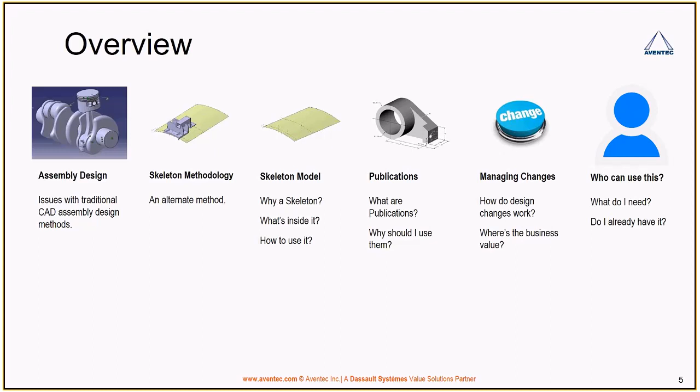Now, if you take a look at a typical assembly design process, you're going to start out by defining what a part is supposed to be doing. So at the part design level, you'll be defining what the specifications are going to be; size, form, fit, function, things like that go first. You probably define some acceptance tests later on as well. Then you go into the design phase where you first start out with some preliminary design, then some high-level design, and ultimately you're going to iterate detailed design until you have a releasable part.

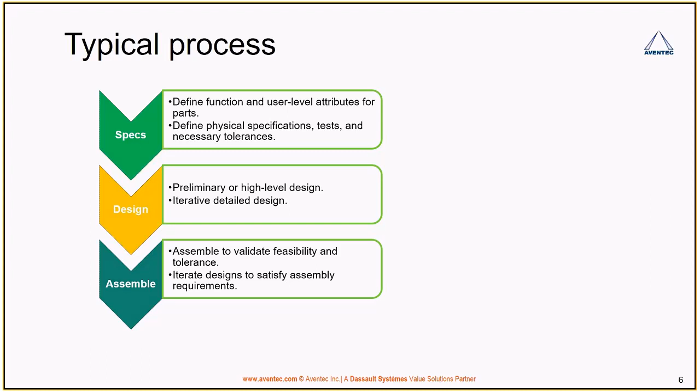And once those parts are released, then an assembly engineer or manufacturing engineer can take those parts, put them together to see if those parts actually fit together within the tolerances. And then they create things like assembly instructions, which go on to methods and down to the production floor. Now, assembling any kind of assembly like that, it's simple and intuitive until you encounter the dreaded change. If you have to make any changes at any part level, effectively you've got to go all the way back to the beginning of the process.

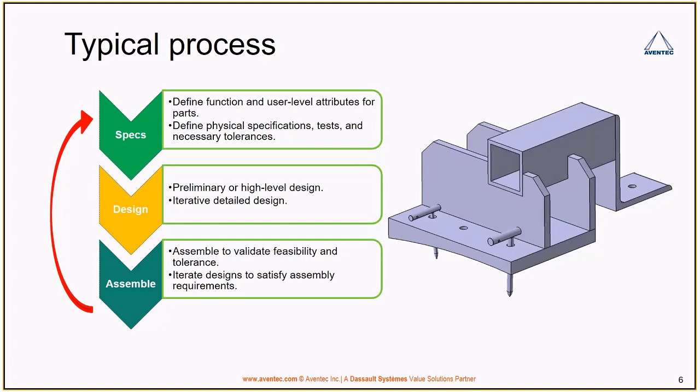Now, this sounds fine until you realize a typical assembly that goes in larger systems has close to about 1,000 parts. And the process keeps repeating itself with the same amount of length, which means every single time you have to change a spec, you've got to go and change the design. Then there's a release process. You have to wait till all of that is done before you can use the latest and most current versions in the final assembly. Right? It's too time consuming.

Another thing that happens when working in big companies, or even small to medium-sized companies, is design takes many faces, right? Well, there's a specifications, requirements, and standards group that defines what needs to be designed and how they need to be designed. The design itself can be separated into structural design, where you design structural components. For instance, on an aircraft, you think about things like the flanges or the stringers or the hangers where pipes or systems go through. Then there's the actual installation design, where you would put in your wiring, your harnesses, your piping, your tubing, your auxiliary or your drop-in black box systems.

And finally, there's the manufacturing sector, which effectively takes the designs that you've made and creates their own work instructions to either treat the part correctly, to manufacture it, to ship it out to your customers, right? And effectively, you come into the situation of way too many chefs who are trying to work on the same design. Now, too many chefs can't work on the same dish, but many engineers can definitely work on the same product. But you have to realize, how long would you wait for something to be done correctly? And do you have early enough oversight if something needs to be changed? If the answer to either of them is waiting long and no oversight, then you're seeing a big failure point for the traditional assembly design method.

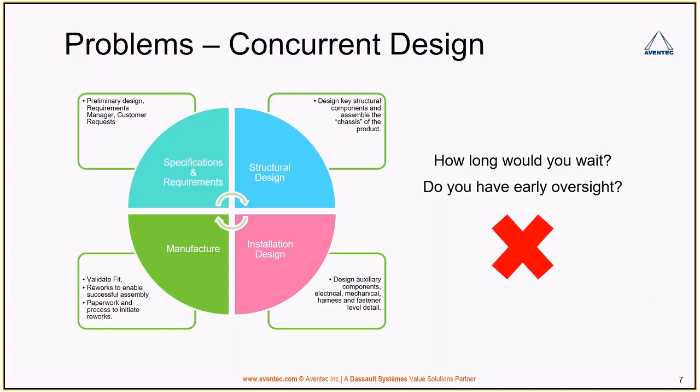Another problem is when you decide to link parts to each other. Now, it sounds extremely intuitive to link a detailed part to a subassembly and then the subassembly to the assembly. It's effectively like playing Legos. And while Legos are cool, you can't build an airplane like a Lego, right? When you design parts or assemblies with part-to-part links, managing those links becomes extremely painful downstream. And if you have part-to-part links, updating links becomes a problem, which, as you get into larger assemblies, tends to become pretty hairy when you're trying to resolve them.

Another big loss. And one of the biggest problems I find with this method is version control. Let's say, for instance, you've got two sample designers working on a particular design, and from those designers it goes to the reviewers and approvers, and then let's say management has a copy that they want to show to higher ups or customers or whatever the case may be. Effectively, everybody has a copy on their own machine. There are way too many versions, and how do you know which version is the most updated if change has to trickle down or trickle up? And if you don't know that, how can you be sure consistently? If these take too much time in your operations, this is a huge loss.

That's why I'm here to introduce skeleton methodology, in which parts are built in context using the Part Design app. What that means is the skeleton lies at the center of the structure, and around it, all the parts are built. So since everything is built around the skeleton, you don't really need any assembly or constraining, because it's kind of like going to buy a tuxedo or a suit or a dress and having it made around you, as opposed to buying one off the rack and altering it later on, right? Which one do you think is going to fit better? And finally, making changes across the entire assembly is much simpler using this methodology, because if you want to change the way the assembly behaves, simply change the skeleton and the assembly will change automatically.

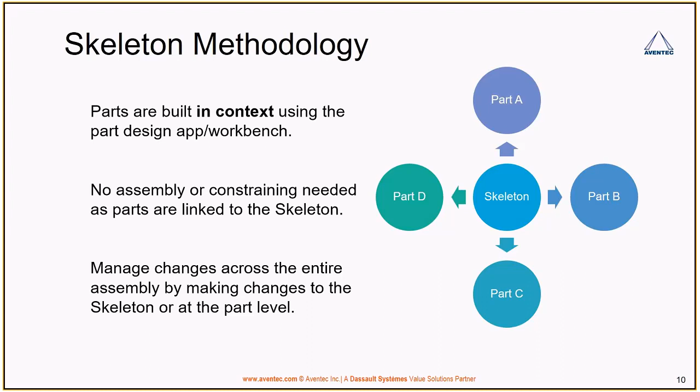So at the heart of this methodology lies the skeleton. It's the most basic form of the assembly. Think of the human skeleton. It's just bones, and it tells you how a certain body looks and behaves. It usually has points, lines, planes, surfaces that define the shape or master surfaces, and you'll have some key parameters. Parameters that tell you angles, size, or distance between two points. And you'll also have something known as publications. I'll talk about publications in just a second.

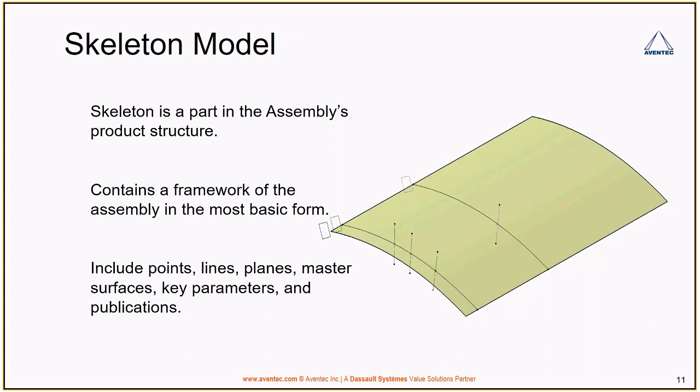Effectively, the easiest way to think about publications is to think about nicknames. When you give certain people nicknames, it's because of what they mean to you. Same thing, you want to give points, lines, or planes, these basic skeleton features, nicknames or publications, so it's easier to identify what role they play in the job you're trying to perform. So you can call points hole centers, part centers, lines center axes, or surfaces bounding surfaces or tool travel surfaces, whatever the case may be.

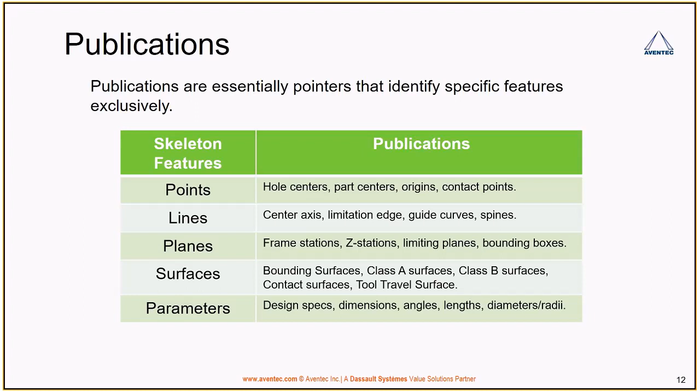It's also key to label or publish your parameters, because it's easy to work with published elements, since the only association you have to your skeleton is the publications. They become the perfect middleman to make any changes, right?

So I'm not going to change the publication. All I'm going to tell the publication is instead of pointing to the first one, you're going to point to the second one, and boom, the design is as if the first design never existed, and it's now placed in the correct position. Traditionally, using assembly design, you would have to remove the constraints and then reconstrain it, but here none of that is required. All you need to do is say, you peg axis, you are now looking at the new center axis, the new line as your reference, and boom, changes are done, right?

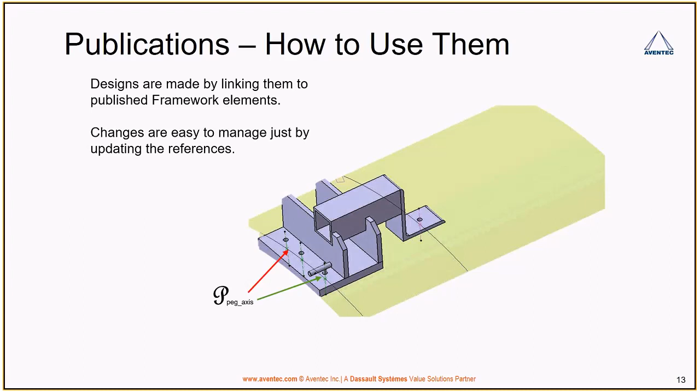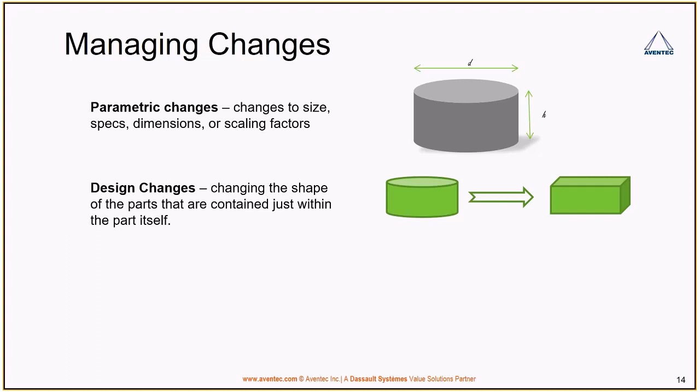And that's why managing changes such as parametric changes—let's say you want to make changes to the sizes, dimensions, or scaling factors—that's easy to do. If you want to make design changes dealing with the actual shape of the object, that's also easy. So you want to change, let's say, a cylinder to a box or vice versa, or you want to change the relationship of the skeleton itself. If you want to change the entire framework, you can do so. Managing that change is really simple.

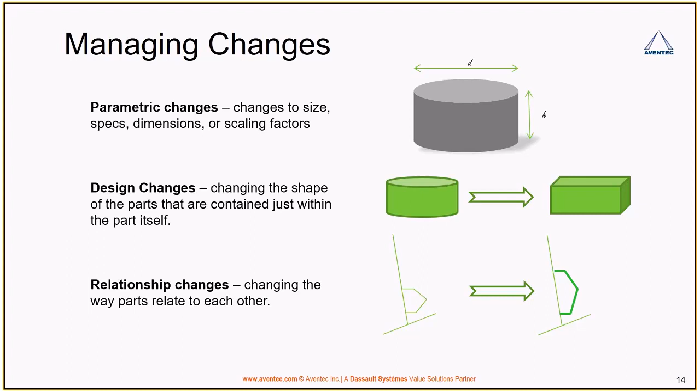In fact, in some situations, if you have to use a different skeleton entirely, you can—if you've done it right, you can actually replace the skeleton and the entire assembly will shift and move to the new skeleton. So it's really cool.

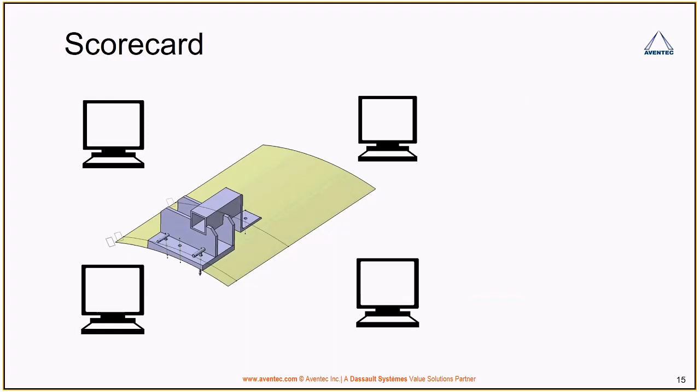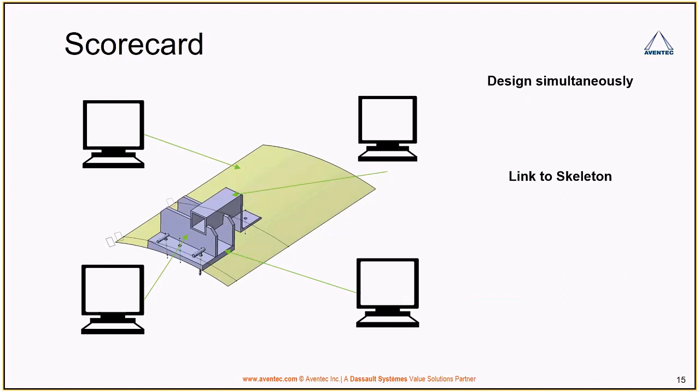So the three main issues I had with traditional methods were that you couldn't work concurrently, that you couldn't do links properly, and that maintaining versions was tough to do. But in relational or skeleton methodology type design, you're able to design simultaneously. Everybody can work on their own part at the same time without getting in each other's way. You can link to the skeleton so that you're never making part-to-part links. And finally, you've got a single master version, meaning there's a single source of truth in your assembly—no multiple versions, since everything works off one object, one skeleton, and one assembly. Win, win, and major win.

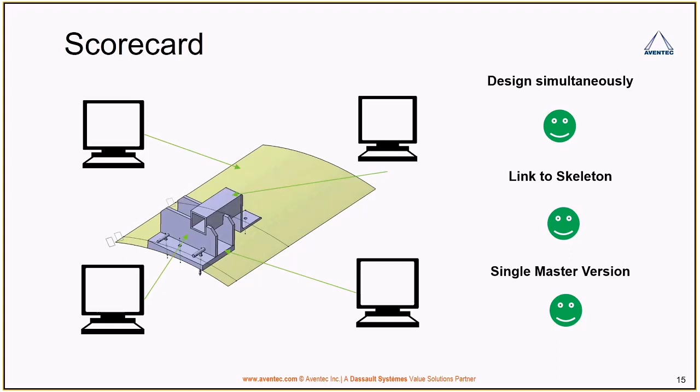So now you must be thinking, thanks to this awesome technology or methodology, how do I get on this and save time now? Well, before you do that, you should first ask yourself: where do you see yourself using this? Is this right for you? Generally, skeleton methodology works best when it's done in a collaborative way, where you have multiple people working on the same design, across the entire supply chain, who need access to that design.

And you could be anybody within the design supply chain—a designer, structural designer, installation designer, mold and tooling engineer, robotics engineer, sheet metal engineer. You could be a reviewer, design reviewer, somebody who just does approvals. You can be management, you can be executive leadership. If you need access to this, if you provide value or derive value from this assembly, then you can leverage skeleton methodology, right?